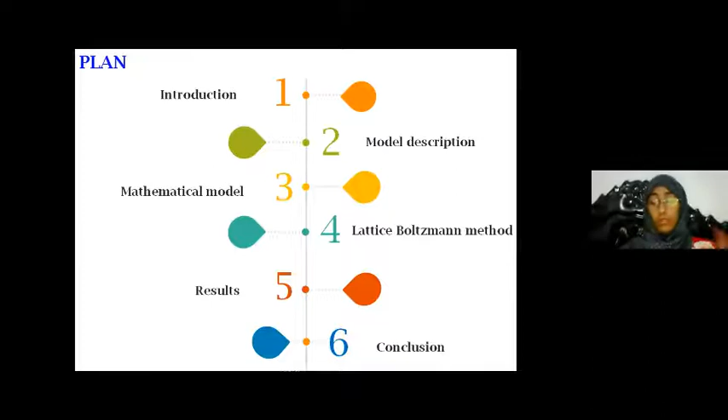This presentation is organized as follows. I will start with an introduction, then present the physical model, then the mathematical model. I will talk about the method used for my numerical simulation, which is the Lattice Boltzmann method. Then I will present some results, and finally the conclusion.

The main topics of my presentation are forced convection heat transfer in the porous channel, which is saturated with phase change materials. Local thermal non-equilibrium and the entropy generation rate criteria are calculated during this investigation using the thermal Lattice Boltzmann method.

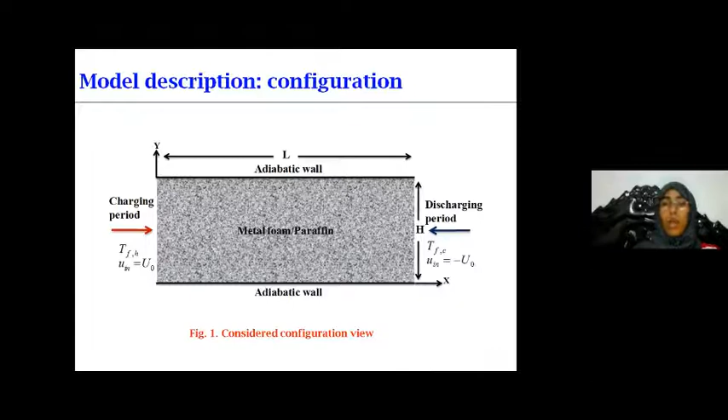At the entrance of the channel, the fluid flow, which is air, enters at constant hot temperature at uniform velocity to allow paraffin to start melting, and at the end, the air leaves the channel at a lower temperature, considered as a cold and constant temperature. Then to initiate the discharging process, the fluid flow returns conversely with the same uniform velocity.

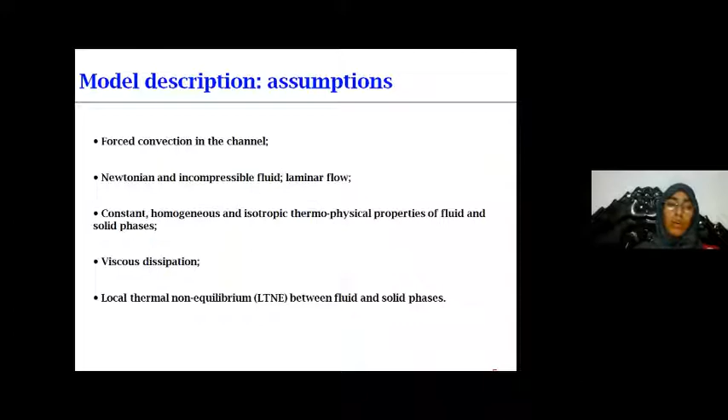The assumptions used to simplify the mathematical model are as follows: forced convection prevails in the channel; the fluid flow is considered to be Newtonian and incompressible; the thermophysical properties of both phases, solid and fluid, are constant, homogeneous, and isotropic, where viscous dissipation is taken into account, and local thermal non-equilibrium between the two phases is considered.

I will present the mathematical model in dimensionless form. The variables and parameters used are as seen.

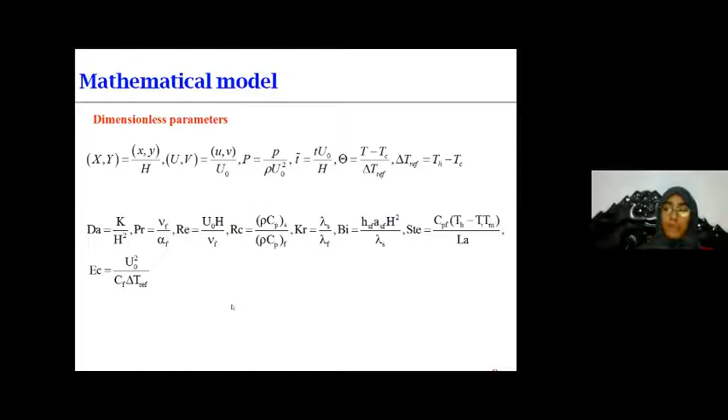The mathematical model presents the mass equation, the momentum equation, and the two energy equations, one for the solid phase and the other for the fluid phase.

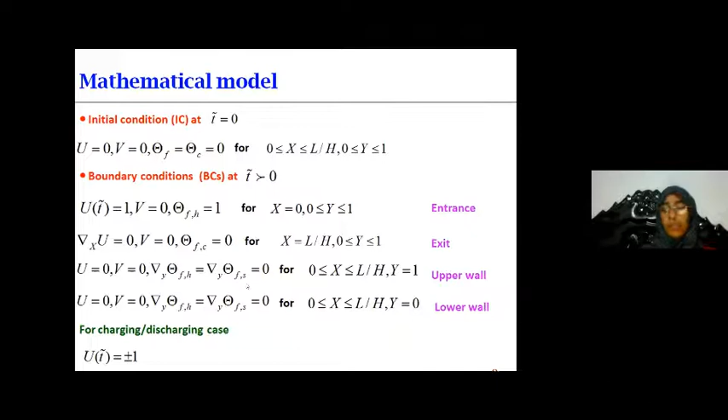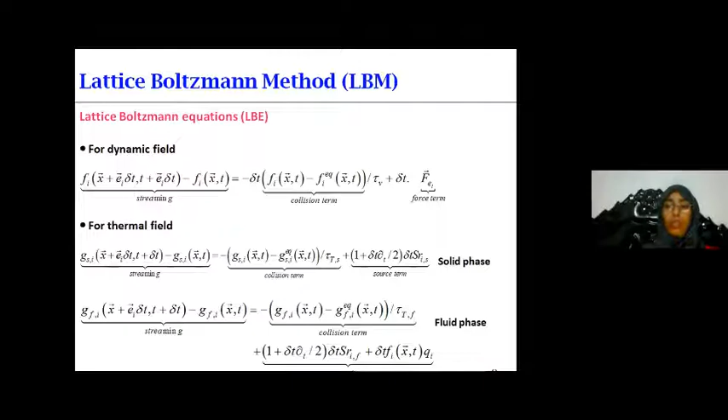The method used to do the numerical simulation is the Lattice-Boltzmann method, which consists of two fields. For the dynamic field, we have one equation. However, for the thermal field, we have two energy equations, one for the solid and the other for the fluid phase.

The Lattice-Boltzmann method consists of two main steps: collision and propagation. For the collision step, the particles are in the same node, and when they leave the node to the neighbor's node, we are talking about the propagation step.

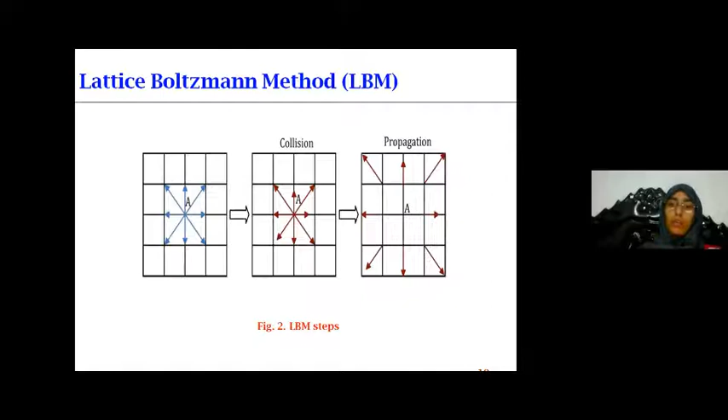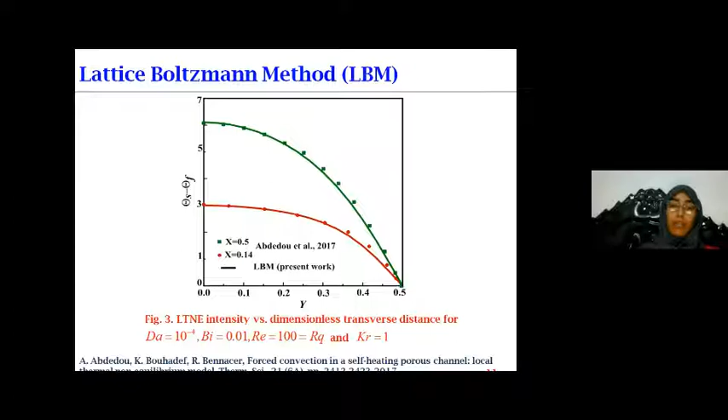To validate our in-house code, a comparison is done with the results in literature, that of Abdedou et al. We represent the dimensionless local thermal non-equilibrium, and as seen from this comparison, it can be stated that our in-house code gives satisfactory results.

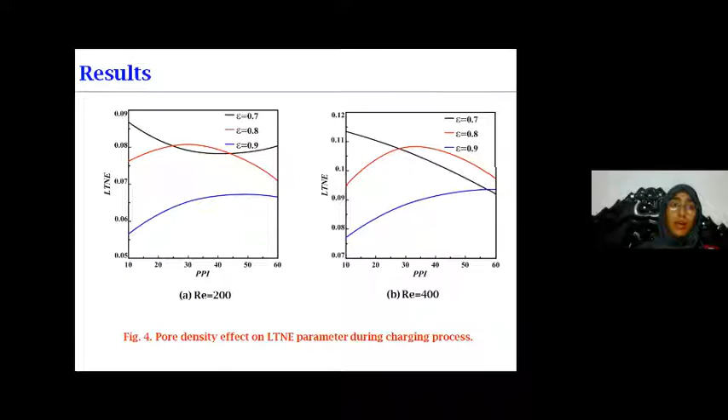The results that will be presented in this presentation are as seen: the local thermal non-equilibrium parameter, represented in Figure 4 during the charging process for two Reynolds numbers, 200 and 400, for three different porosities and different pore sizes of metal foam.

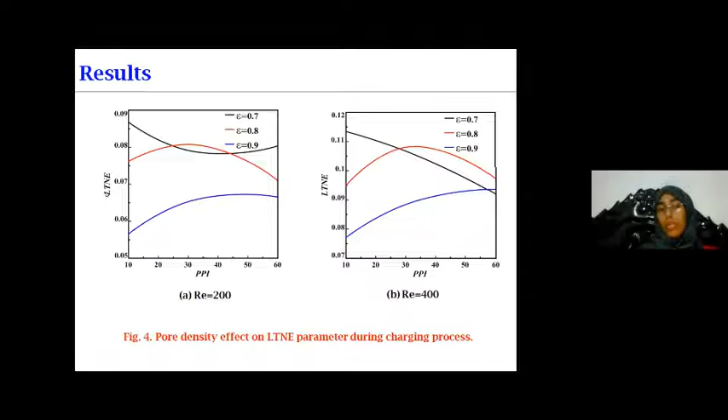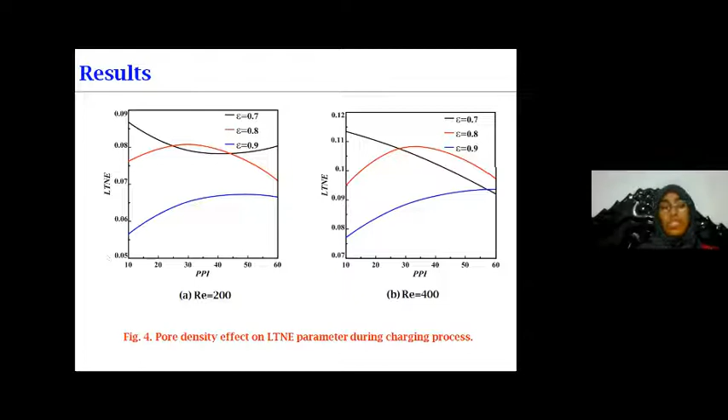It must be noted that for the local thermal equilibrium criteria, if it exceeds 5%, that means 0.05, so the local thermal non-equilibrium condition must be used. However, if the LTNE parameter is less than 0.05, the local thermal equilibrium must be used.

As seen from this figure, during charging process, the local thermal non-equilibrium condition must be used, and for high porosity, as the pore density increases, the LTNE increases.

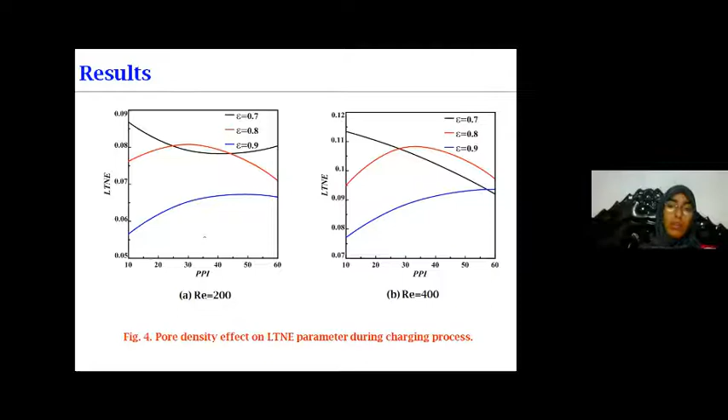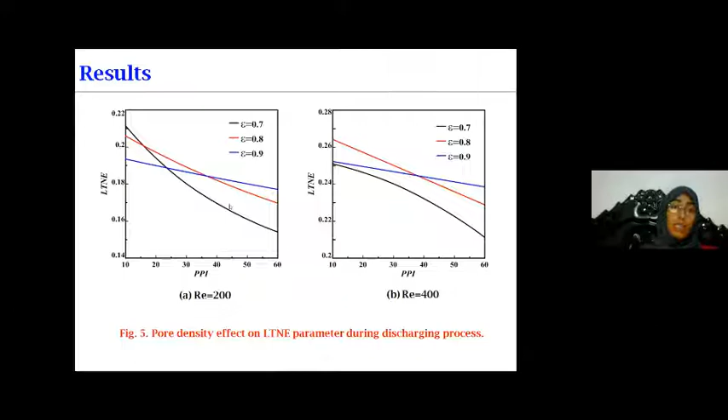Also, the LTNE is presented in Figure 5 during the discharging process for the same two Reynolds numbers. As seen here, the local thermal non-equilibrium criterion exceeds 5%, so the local thermal non-equilibrium condition should be considered in this investigation.

As seen during this process, the LTNE parameter decreases with the pore density of metal foam.

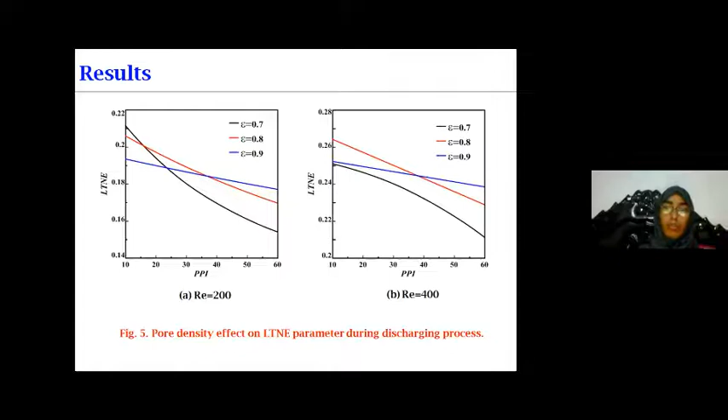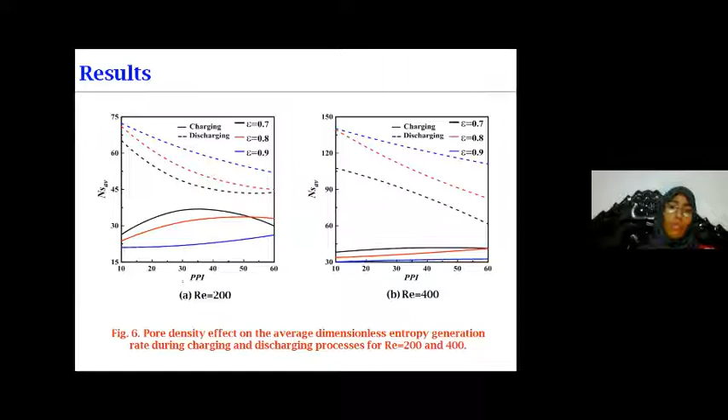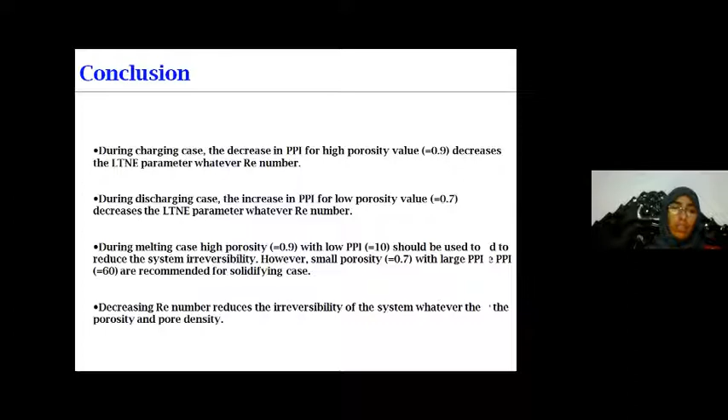During the discharging case, the increase in pore density for low porosity decreases the LTNE parameter, whatever the Reynolds number. During melting case, that means the charging process, high porosity with low pore density should be used to reduce the system irreversibility. However, small porosity with large pore density is recommended for solidifying case, that means for discharging process. The decrease in Reynolds number reduces the irreversibility of the system, whatever the porosity and pore density.